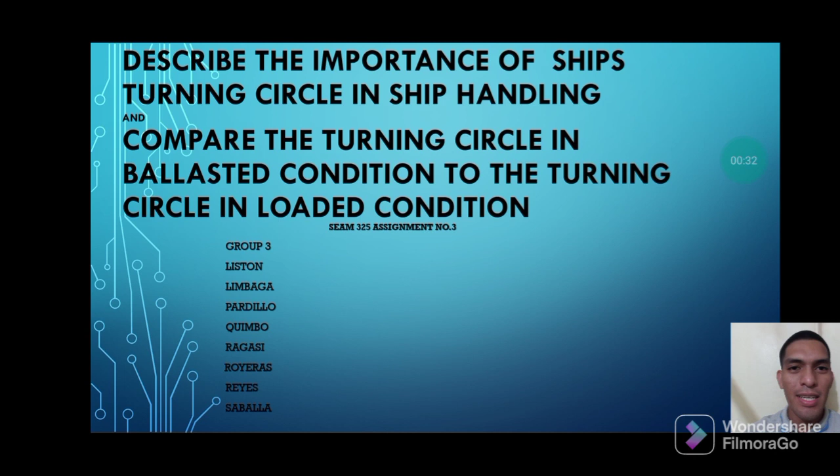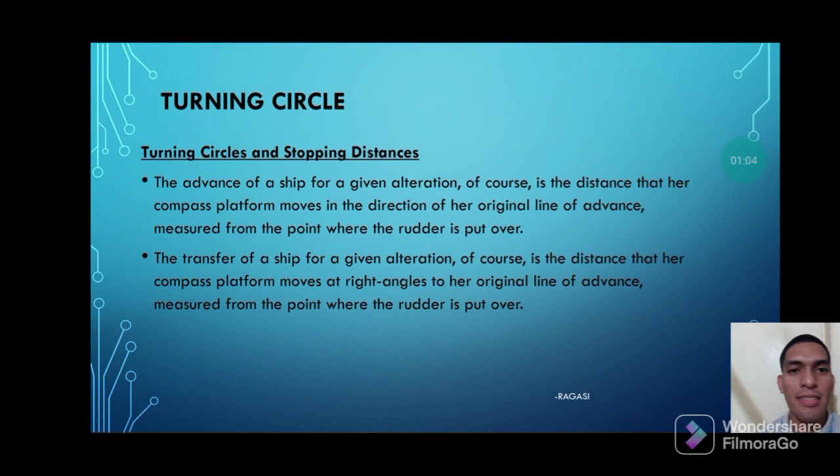Turning circles and stopping distances: the advance of a ship for a given alteration of course is the distance that her compass platform moves in the direction of her original line of advance, measured from the point where the rudder is put over. The transfer of a ship for a given alteration of course is the distance that her compass platform moves at right angles to her original line of advance, measured from the point where the rudder is put over.

Good day everyone, I am Cadet Reyes and the following factors determine the acceleration power of the ship. First is the momentum of the ship, which depends upon the mass of the ship and the speed of the ship. Thus a lighter ship will gain or lose speed faster than a deeply loaded ship.

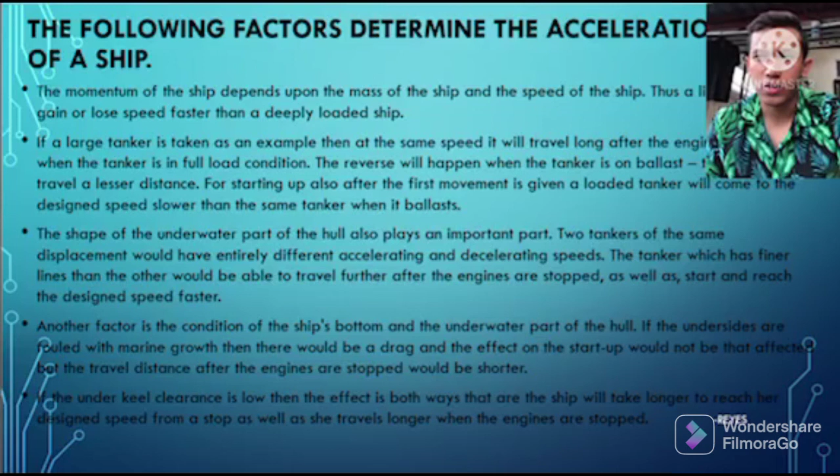If a large tanker is taken as an example, then at the same speed it will travel longer after the engine is stopped when the tanker is in full load condition. The reverse will happen when the tanker is on ballast, that is, it will travel a lesser distance. For starting up also, after the first movement is given, a loaded tanker will come to the designed speed slower than the same tanker when in ballast.

Two tankers of the same displacement would have entirely different accelerating and decelerating speeds. The tanker which has finer lines than the other would be able to travel farther after the engines are stopped, as well as reach the designed speed faster.

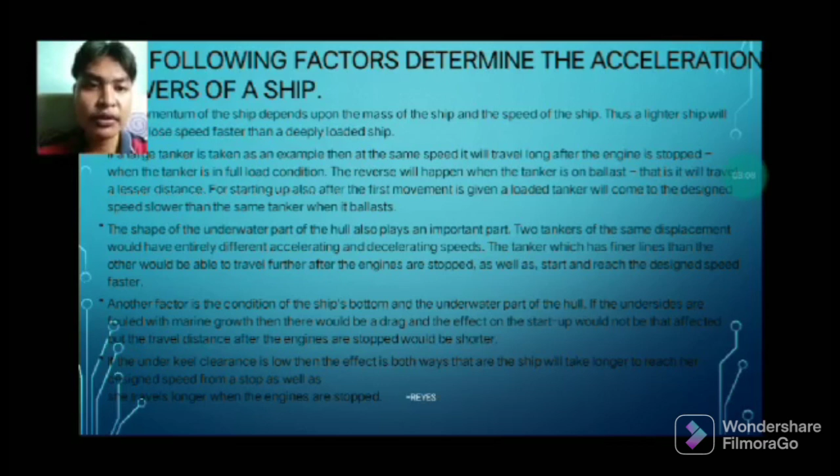Another factor is the condition of the ship's bottom and underwater part of the hull. If the hull is fouled with marine growth, there will be drag, and while the startup would not be affected, the travel distance after the engines are stopped would be shorter. Also, if the underkeel clearance is low, the effect is both ways: the ship will take longer to reach her design speed from stop, as well as travel longer when the engines are stopped.

Good day everyone, I am Cadet Liston and I'll be the one reporting this slide. Factors affecting speed: foul bottom. If a ship lies for long in harbor, particularly in a tropical harbor, her bottom becomes fouled by weeds, barnacles, and other marine parasites or growths, and the speed attainable with a given number of revolutions is reduced.

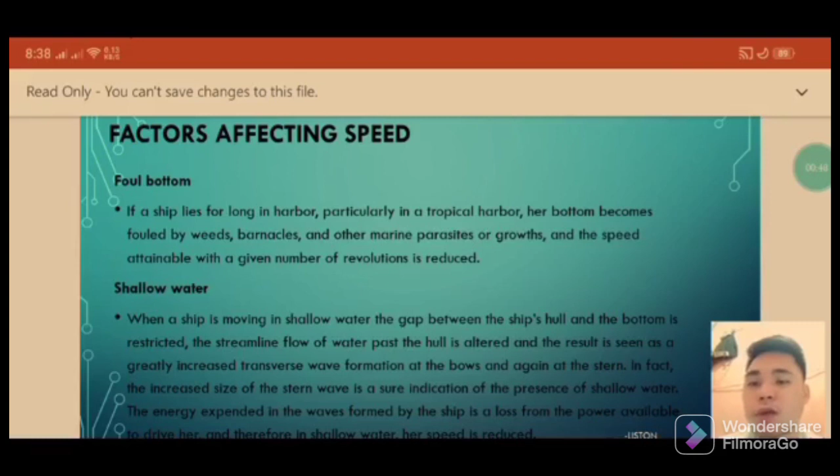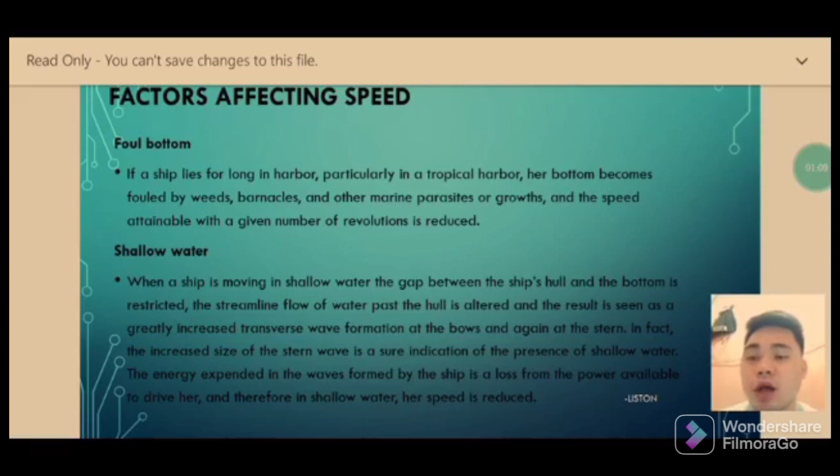Shallow water: when a ship is moving in shallow water, the gap between the ship's hull and the bottom is restricted. The streamlined flow of water past the hull is altered, and the result is a greatly increased transverse wave formation at the bows and again at the stern. In fact, the increased size of the stern wave is a sure indication of the presence of shallow water. The energy expended in the waves formed by the ship is a loss from the power available to drive her, and therefore in shallow water her speed is reduced.

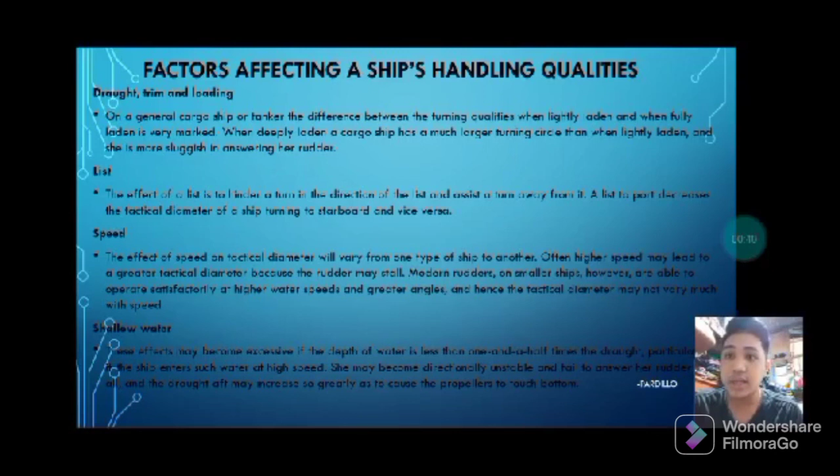List: the effect of a list is to hinder a turn in the direction of the list and assist a turn away from it. A list to port decreases the tactical diameter of a ship turning to starboard, and vice versa.

Speed. The effect of speed on tactical diameter will vary from one type of ship to another. Often, higher speed may lead to a greater tactical diameter because the rudder may stall. Modern rudders on smaller ships, however, are able to operate satisfactorily at higher water speeds and greater angles, and hence the tactical diameter may not vary much with speed.

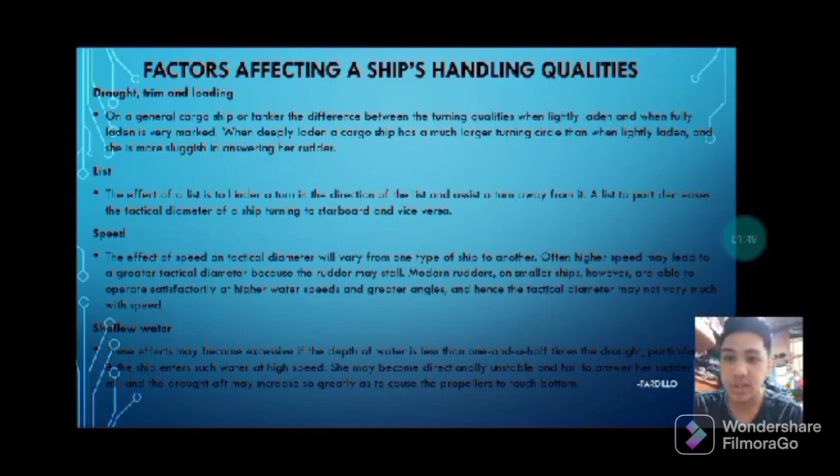Shallow water. These effects may become excessive if the depth of the water is less than 1.5 times the draught, particularly if the ship enters such water at high speed. She may become directionally unstable and fail to answer her rudder at all, and the draft may increase so greatly as to cause the propellers to touch the bottom.

Good day, I am Cadet Kimbo Eljanjoy and I'm going to report about the effect of hull form on turning circle.

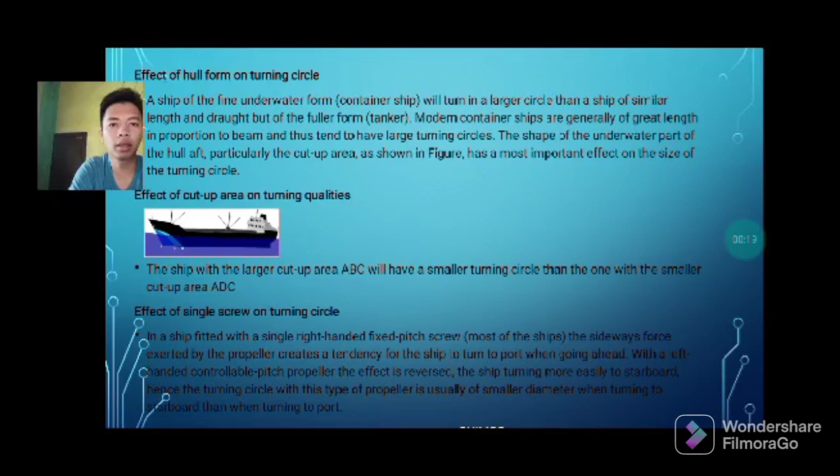A ship of fine underwater form, or a container ship, will turn in a larger circle than a ship of similar length and draught but of fuller form, like a tanker. Modern container ships are generally of great length in proportion to beam and thus tend to have large turning circles. The shape of the underwater part of the hull aft, particularly the cut-up area, as shown in the figure, has a most important effect on the size of the turning circle.

Effect of cut-up area on turning qualities. The ship with a larger cut-up area, ABC, will have a smaller turning circle than the one with a smaller cut-up area, ADC. Effect of single screw on turning circle.

In a ship fitted with a single right-handed fixed pitch screw, or most ships, the sideways force exerted by the propeller creates a tendency for the ship to turn to port when going ahead. With a left-handed controllable pitch propeller, the effect is reversed, the ship turning more easily to starboard. Hence, the turning circle with this type of propeller is usually of smaller diameter when turning to starboard than when turning to port.

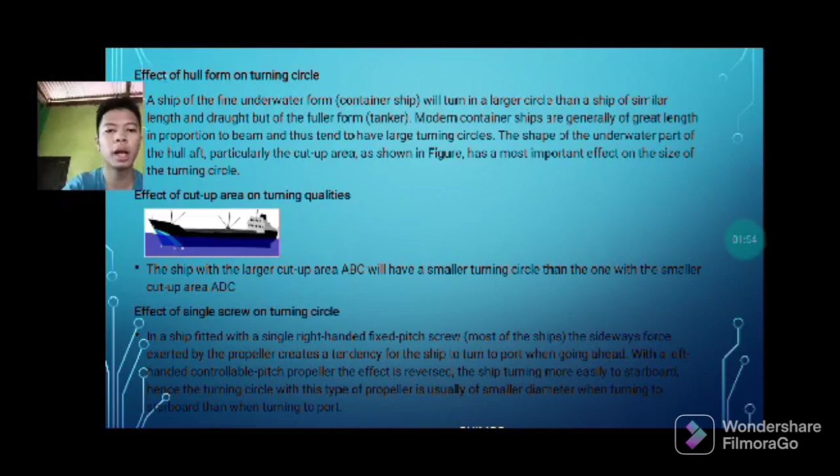Turning. Effect of turning on speed. The effect of drag on the rudder, and the sideways drift of the ship, will result in progressive loss of speed while turning, even though the engine revolutions are maintained at a constant figure.

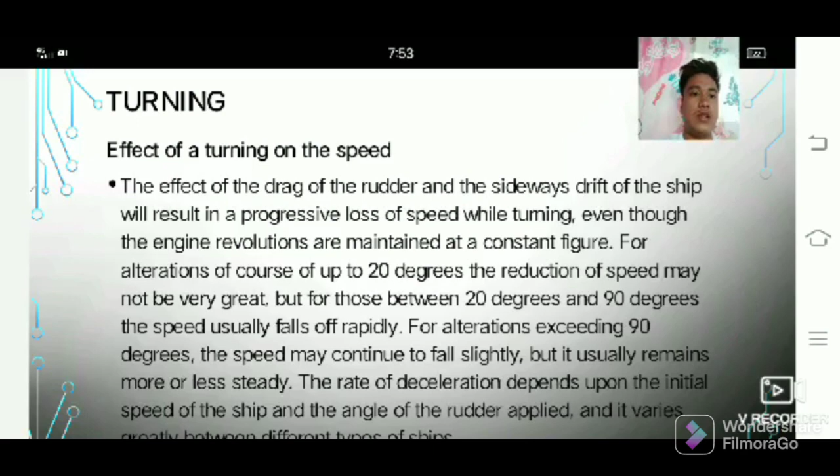For alteration of course up to 20 degrees, the reduction of speed may not be very great, but for alterations between 20 degrees and 90 degrees, the speed usually falls rapidly. For alterations exceeding 90 degrees, the speed may continue to fall slightly, but it usually remains more or less steady. The rate of deceleration depends upon the initial speed of the ship and the angle of the rudder applied, and it varies greatly between different types of ship.

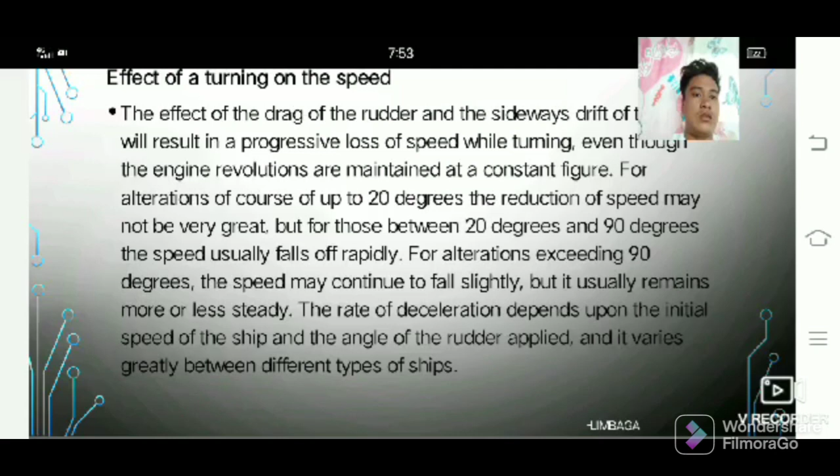Good day, sir. I'm Cadet Ivan Saballa. I'm here to discuss heel when turning.

The initial heel when the wheel is put over is inwards, because the rudder force is acting at a point below the center of gravity of the ship. As the ship begins to turn, the centripetal force on the hull, which is greater than the rudder force acting through water pressure at a point below the center of gravity, overcomes the tendency to heel inwards and causes her to heel outwards. This outward heel is very noticeable when turning at good speed.

If the wheel is eased quickly, the angle of outward heel will increase, because the counteractive rudder force is removed, while the centripetal force remains until the rate of turning decreases.

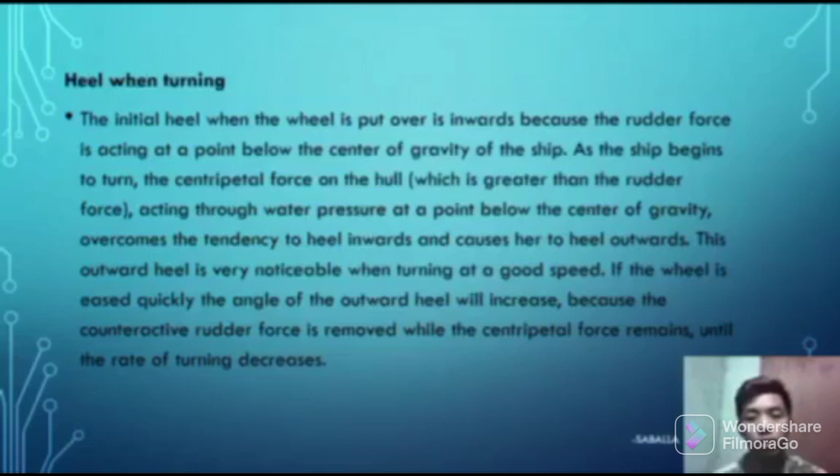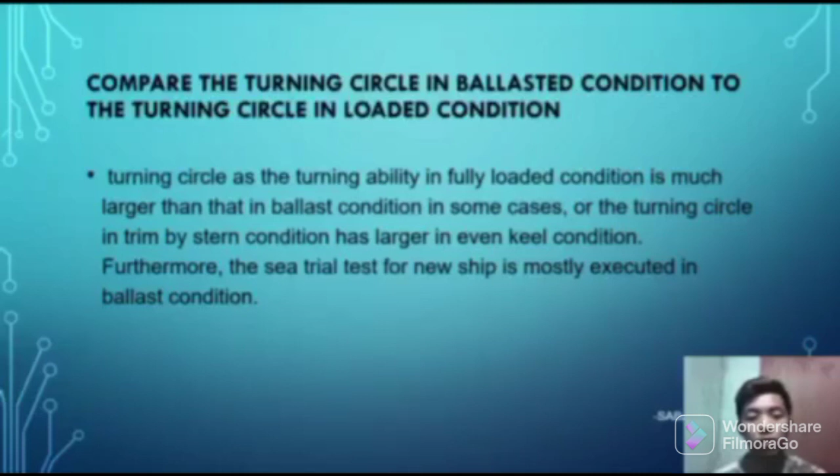Next, compare the turning circle in ballasted condition to the turning circle in loaded condition. The turning ability in fully loaded condition is much larger than that in ballast condition. In some cases, the turning circle in trim by stern condition is larger than in even keel condition. Furthermore, the sea trial test for a new ship is mostly executed in ballast condition.

Compare the turning circle in ballast condition to the turning circle in loaded condition. The turning ability in fully loaded condition is much larger than that in ballast condition. In some cases, the turning circle in trim by stern condition is larger than in even keel condition. Furthermore, the sea trial test of a new ship is mostly executed in ballast condition. Thank you.